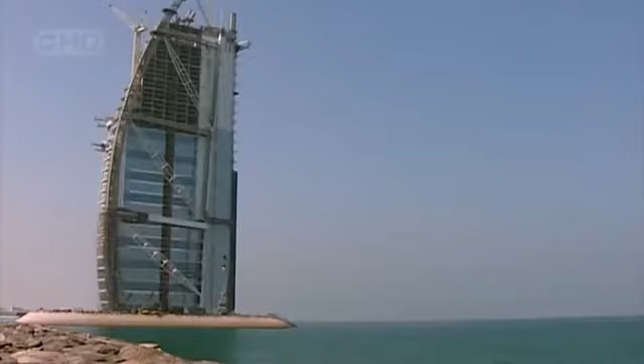Standing proud off the coast of Dubai is one of the most incredible buildings on the planet. At 321 meters, it soars higher than the Eiffel Tower. It's the tallest hotel on Earth and possibly the most luxurious, a structure designed to amaze. Its name means the Arabian Tower. This is the Burj Al Arab. But creating this 21st century icon will be an epic struggle that pushes everyone involved to the limit.

In November 1994, construction begins on what is planned as the world's tallest and most luxurious hotel. The pressure is on from day one. With the eyes of the world watching, no one on the project will want to disappoint this particular client.

Sheikh Mohammed bin Rashid Al Maktoum, Dubai's crown prince, is the visionary behind this amazing building. The project is his response to the economic time bomb his country confronts. As his close advisor, Sultan bin Sulayem knows all too well: he knew that we don't have oil, he knows that oil is going to end someday. And they have two choices: either go and do something about it and find other alternative ways to sustain the life for the people of Dubai, or sit waiting for help.

Only 50 years ago, Dubai was a dusty backwater, home to pearl divers, coastal traders and Bedouin. Then, in the 1960s, prospectors discover oil. The sudden injection of millions of petrodollars transforms the sheikhdom. But geologists predict the oil boom will be over by 2016. The good life could end just as quickly as it began, when the wells run dry.

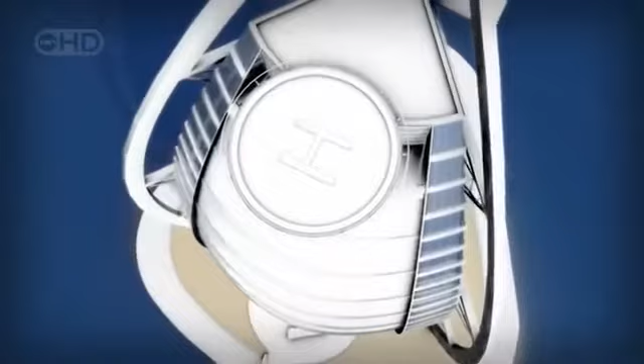Facing future economic meltdown, Sheikh Mohammed makes a crucial decision. He will turn his country into one of the world's most exclusive holiday destinations, a playground for the rich on the Arabian Gulf Coast. The Sheikh needs a luxurious centerpiece to launch his country into high-end tourism. He stakes what some speculate is over $1 billion on the tallest, most lavish hotel in the world, with a unique 7-star reputation, the Burj Al Arab.

I think it was very important to put Dubai on the map of the world. There's no hotel like this hotel. It takes guts, and Sheikh Mohammed has a lot of guts.

The Sheikh's courage is clear from his choice of architects, a radical young team from Britain, brave enough to take up the challenge, but very short on experience. They are led by Chief Architect Tom Wright. We had an average age of 32, not a grey hair between us, and none of us had gone over about 15 stories. I was quite staggered by the scale and the immensity of the project.

Tom Wright and his colleagues have a reputation for innovative engineering, but they're more used to designing schools and offices. But Dubai is a place where connections can make all the difference. Through a contact in the ruler's office, the team gets its break. Sheikh Mohammed agrees to a meeting and is so impressed with their initial concepts, he awards them the contract.

Now Wright must turn his sketches into a design so remarkable, the building becomes a world-renowned landmark. We had many sleepless nights worrying that the building we'd designed wouldn't turn out to be at all iconic. Wright knows he must push his design to the limits.

A building only becomes an icon when its form is simple but unique. We decided that if you could draw a building simply with a few strokes of a pen, and it was instantly recognizable as not only the building, but the place, Dubai in this case, you'd created something that was iconic.

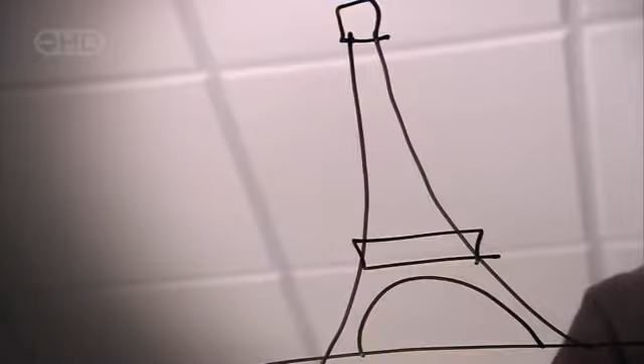So if you consider these buildings in the world, there are probably no more than 10 maximum that have actually achieved this status. Australia, Sydney Opera House. As with all these buildings, it's usually just the first couple of lines that actually make you know exactly where the building is. Paris, and you have to put a flag on the top.

Can Tom Wright and his team compete with the likes of Gustave Eiffel? This is a once-in-a-lifetime challenge.

All the brainstorming pays off when Wright finally has his eureka moment. We were sitting there having a beer, watching the modern sailing yacht come out of the Dubai Offshore Sailing Club. You think of excitement, you think of exhilaration, and we went, hey, this must be the one. The form we came up with is very simple, and within a few lines, I think you can see that it has all the elements of an iconic building. It's simple and instantly recognizable.

The concept immediately catches the Sheikh's imagination. A sail billowing in the wind has deep meaning for the people of Dubai with their seafaring heritage. To complete the nautical image, Wright wants the structure to rise out of the water like a massive yacht. But this will require an island as a base, and there are none.

Wright's undeterred. He proposes they build an island specifically for the hotel, a first for Dubai. Constructing the hotel out at sea will significantly add to the risk and cost.

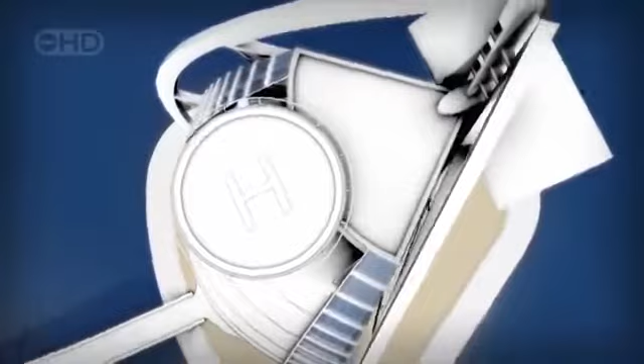Sheikh Mohammed is prepared to take the risk. The hotel will be built 280 meters off the coast. No one has ever built a skyscraper this high on an artificial island. This 321-meter structure, weighing 250,000 tons, will need to stand firm against earthquakes and Gulf storms. Wright has won the first of many battles. The Burj will rise out of the sea. But time and again, his refusal to compromise will force his colleagues to push the boundaries of engineering to the limit.

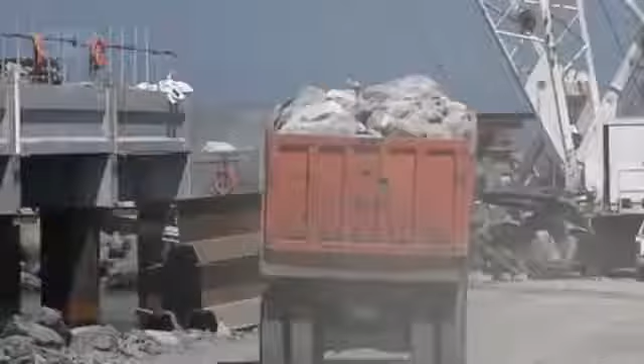By early 1995, the construction team is hard at work on Phase 1, building a low-lying island. But the inexperienced architects are about to get a taste of Dubai's extreme weather.

April the 27th, a powerful storm known as a shamal sweeps across the Gulf, hitting the coast with a vengeance. A set of construction barges lie in its path, each laden with 10,000 tons of rock. The architects have planned for all weather conditions, but the storm's intensity still shocks Simon Crisp. We had 3 or 4 metre waves bashing onto the beach. To see the waves coming in like this was really quite a wake-up call for us.

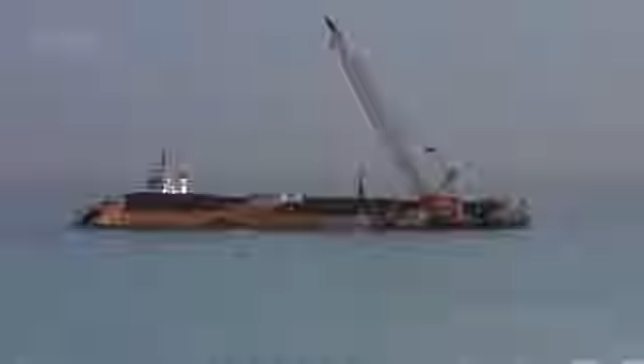One huge barge breaks loose and slams into the mainland. The team realizes the damage this kind of storm could inflict on their island hotel. We had a really graphic example of how powerful the Arabian Gulf can be when it's angry. The architect's decision to expose their structure to these forces could have serious consequences. The engineers will have to struggle to produce a low-lying island capable of resisting nature's fury.

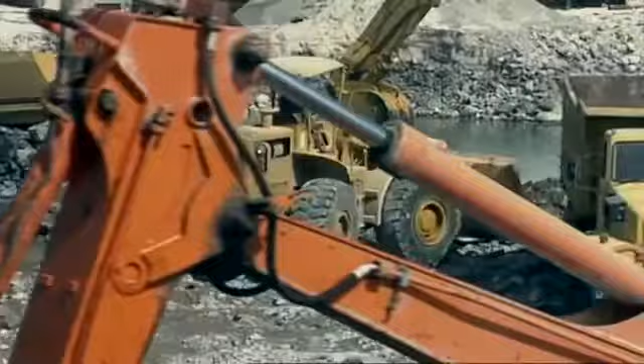The man-made island for the world's tallest hotel has hit a critical stage just 5 months into the build. Dubai's Sheikh Mohammed is depending on this project, the Burj Al Arab, to convert his country from oil producer to top-class tourist destination. But a debate rages over the island's height. Architect Tom Wright wants to make it low to give the impression of a sail rising out of the water.

We argued a lot about the height of the island. From a design point of view, I wanted people to be close to the sea. From the start, he's gone head-to-head with engineer Mike McNicholas, who's responsible for the island's safety. So I wanted the island as low as you possibly could, you know, skimming the sea. I'm coming from the other end, needed to make sure we were protecting the island.

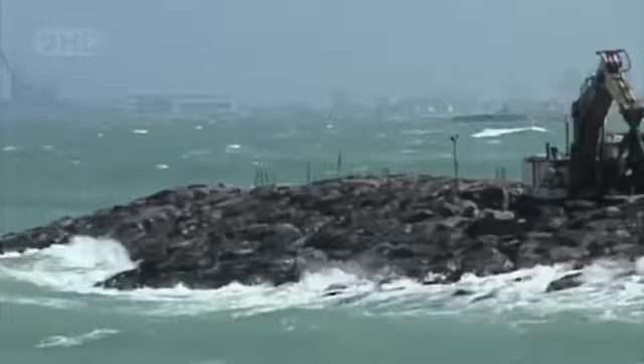McNicholas's worst fear is that waves breaking over the island could damage the hotel or even drag guests into the sea. Initially, the engineers planned to build the island using rocks. They are available locally and the technology is proven. But Wright rejects this. A rock island would have to be far too large to repel the sea safely.

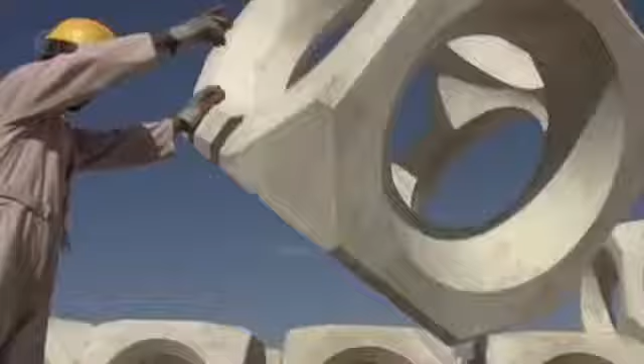To keep the island low, McNicholas experiments with pioneering concrete blocks designed to reduce the impact of waves. But no one in the Gulf has ever used these blocks before. I had to insist with the team that we carried out tank testing. It was the only way we were going to be sure that the island would be safe.

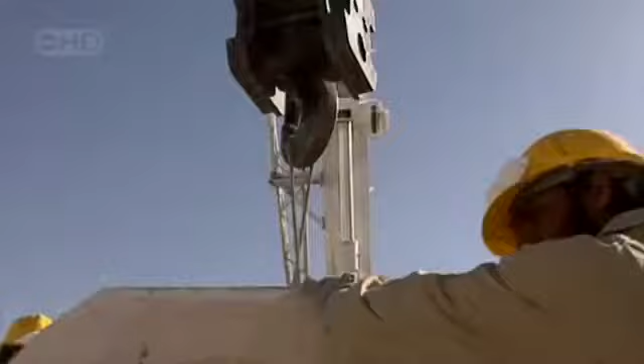These tests replicate the power of the tallest waves that can occur once in 100 years and send them crashing into a series of differently configured models. 3 weeks of testing prove the hollow blocks will work.

The construction team builds the island with steep rock slopes, then covers them in concrete armor to absorb the force of the waves. These ingenious blocks work like a sponge. As the wave hits, the water passes inside the space and turns around on itself. The force is largely dissipated. With the engineers' help, architect Tom Wright has won his battle for a secure island that rises only 7.5 meters above the waves.

Now the team begins the second stage of construction.

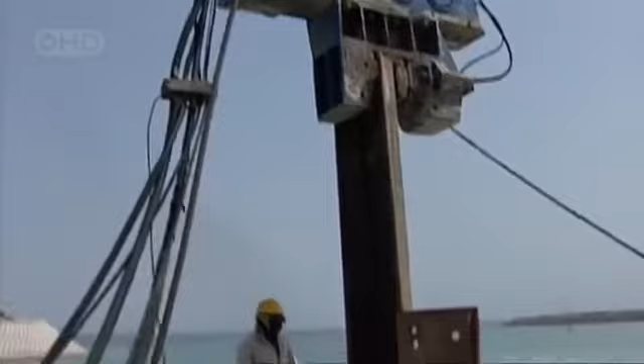In the center of the island, construction workers drive huge lengths of steel 20 meters into the ground. This creates a triangular steel wall known as a cofferdam, which will become the outside of the hotel basement once they excavate the sand from inside.

But removing the sand could be dangerous. That was a real challenge for us. It's sleepless days and nights, seven days a week, figuring out how we were going to stop the seawater coming into the structure, and how we were going to stop the seawater coming around our structure from beneath and flooding it.

The weight of the sea is a huge force on its bed. This pressure forces water through the sand and threatens to flood the artificial island from beneath.

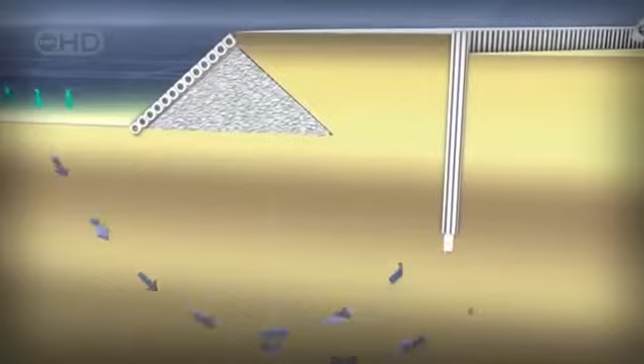To keep the sea out, McNicholas injects liquid cement into the sand to seal off his steel wall from below. But as the sand is removed to form the basement, there's less and less weight to hold back the force of the sea. The cement seal is going to be tested to the limit. In the worst case, the pressure caused by that water movement could have blown the whole bottom of the excavation like a champagne cork.

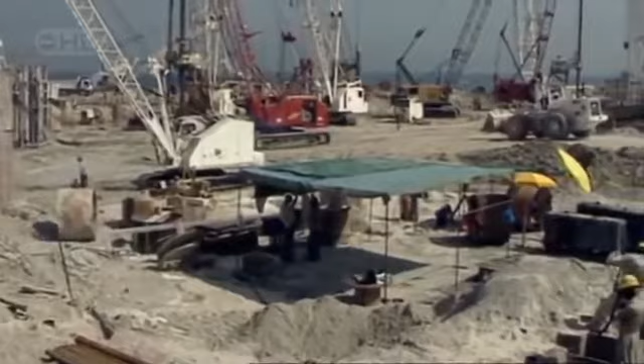If McNicholas's calculations are wrong, the excavation could be swamped, killing hundreds of workers. But he stands by his design. With the cement seal in place, the excavators begin to remove the sand.

As the man responsible, he's not going to let the workers face the risk alone. I felt I had to be one of the first guys down at the bottom of the excavation, looking up 10 meters above myself, thinking, each side of this cofferdam is 7,500 tons of sea pressure pushing in.

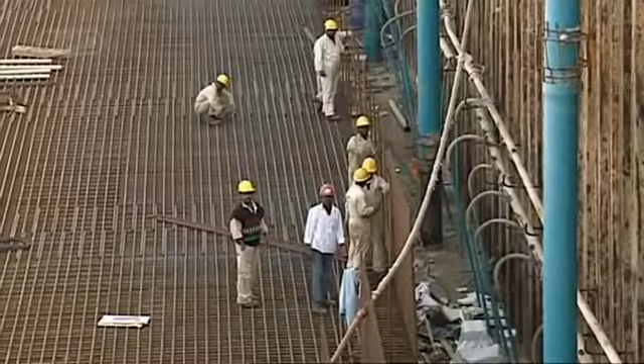When put to the test, both wall and seal hold firm. One of the probably proudest moments of my career was being stood on that excavation and looking around and seeing the steel wall there surrounding me and thinking, we are holding back the sea. My design worked.

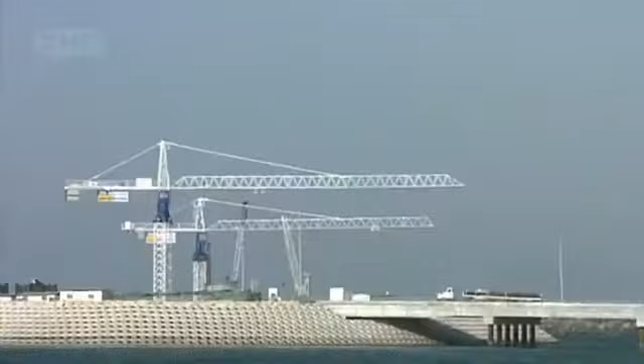November 1995. The artificial island for the tallest all-suite hotel in the world is now complete. The construction team starts phase 3 of this one-off project, the foundations. The support needed for any skyscraper is vast.

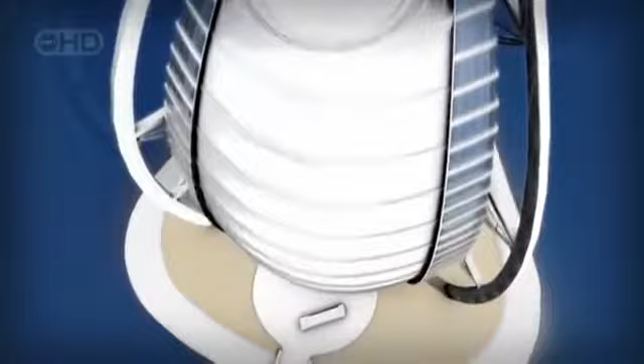But the location of the Burj Al Arab presents an added challenge. It had never been done before to build something like this on reclaimed land. We're talking about a 300-metre high tower on a man-made island in 6 metres of the Arabian Gulf.

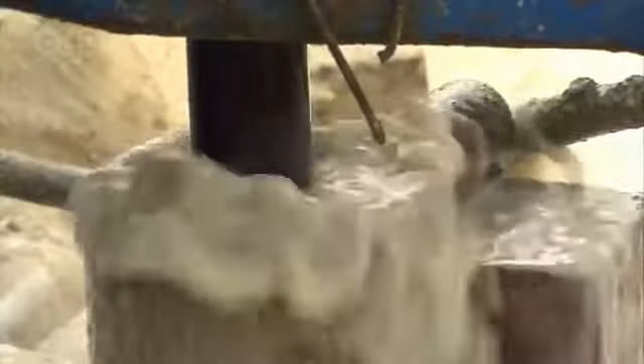The problems multiply when the results of earlier core tests reveal bad news. The team searching for bedrock drilled deep into the seabed, but even a full 180 meters down, there was no solid rock. This will make their job tougher, but the architects remain defiant.

The average person would think we're crazy to build something like this on sand, let alone out in the water. How will this 300-meter structure stand firm against earthquakes and winds of close to 150 kilometers an hour when its foundations depend on nothing more substantial than sand?

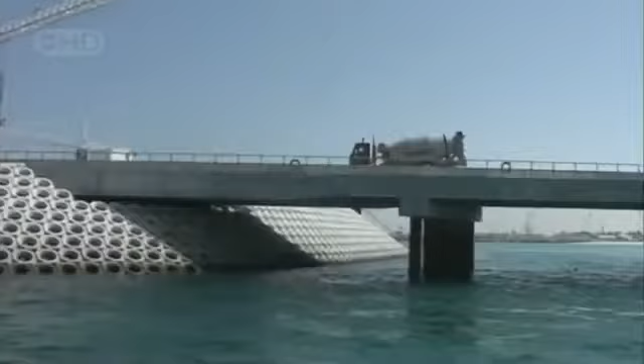On an artificial island 280 meters off the coast of Dubai, construction workers are preparing the ground for the tallest hotel in the world, the Burj Al Arab. But there's no bedrock beneath the site to support the foundations for a skyscraper.

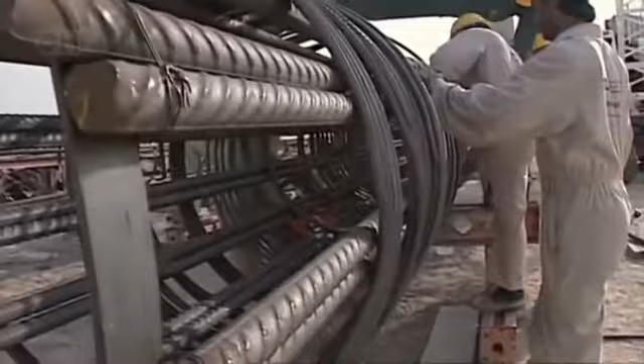The architects have a plan. They want to support the Burj using steel-reinforced concrete foundation piles drilled deep into the sand. So what's to stop the whole structure from just sinking? They are relying on an effect known as skin friction, the resistance that stops two rough surfaces slipping past each other.

Skin friction is all about the contact between the sand and the surface of the pile, and the longer the pile, the further in the ground it is, the greater that effect. I'm going to demonstrate it now by whacking it in. You'll see it starts to move quite quickly with the first few impacts. Now it's starting to stiffen up a bit, even though I'm not hitting it any harder or softer, and the skin effect is starting to really kick in here.

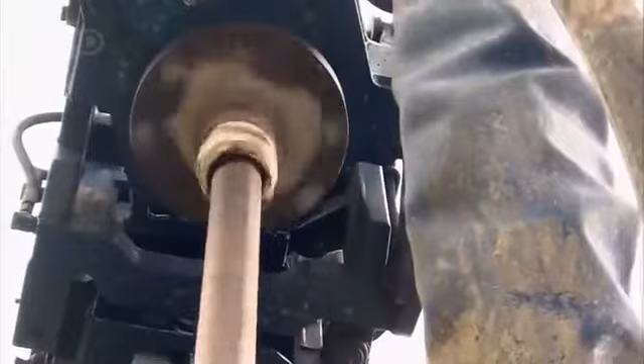Once the friction between the post and the sand around it equals the load of the hammer, the post comes to a halt. The scheme will only anchor the Burj if the sand is compacted enough to create resistance around the building's piles.

The drillers pack sand samples into sealed containers and send them off to be analyzed. If the results show the sand is too loose, then support on the piles anchoring the building could suddenly fail.

The geography of Dubai gives everyone reason for concern. It lies within range of a major fault line, so this soaring megastructure could be vulnerable to earthquakes.

In June 1964, a 7.5 magnitude earthquake hits Niigata in northern Japan. Because the area is built on sandy silt, the tremors flip over entire apartment buildings. This isn't normal earthquake collapse, it's a devastating phenomenon known as liquefaction. As grains of loose sand shake, they fill up any air pockets and compact, taking up less space. The ground stops behaving like solid earth and acts like a liquid. On shifting sand, any building could simply topple.

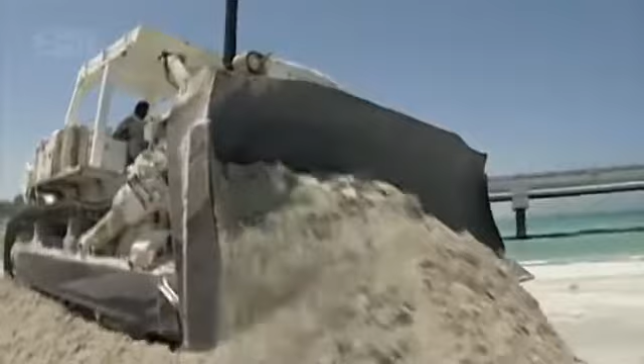When the results of the drilling tests return, it's good news. Deep beneath the site, they find compacted and calcified sand. Liquefaction is not a threat.

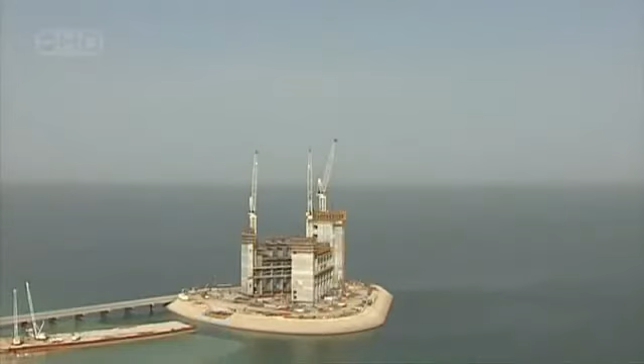One by one, the engineers are solving the challenges thrown up by this extraordinary structure. But in 1996, they brace themselves for a new set of obstacles as Phase 4, the construction of the hotel itself, begins.

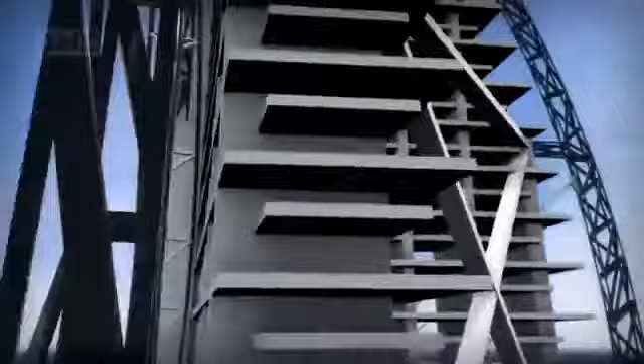This building had to stand up to the worst that the Gulf could throw at it. The hotel itself has slender concrete walls, not capable of withstanding the elements alone. To hold them firm against high winds and earthquakes, the architect devises a visually stunning solution: a gigantic steel structure outside the main building, known as an exoskeleton. A series of vast diagonal trusses tie two huge steel bows to the concrete core at the back of the building.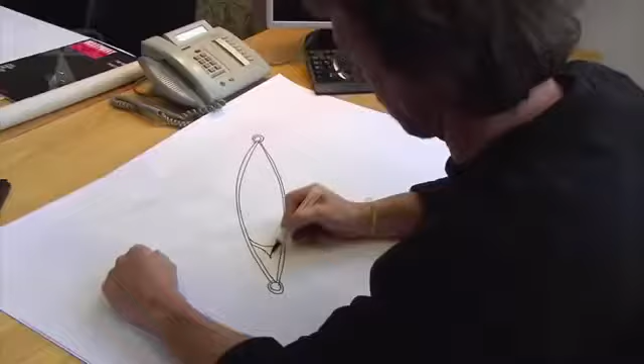Wright's design will make the building unique. But his giant diagonal trusses will make life hell for Anthony McCarter, the engineer who has to make them work. Those trusses gave me 4 months of heartache, sleepless nights, worries, anxiety. They must be incredibly strong to tie the exoskeleton together, but aesthetics are just as vital. It was critical that these diagonals were very, very elegant and also very beautiful as they're so visible.

This building has to wow the world and make Dubai a must-stop destination. Wright's not about to compromise. I used to go to Tom with option after option. I remember one particular occasion where I had 7 options and he went, no, no, no, no good, no good, no good.

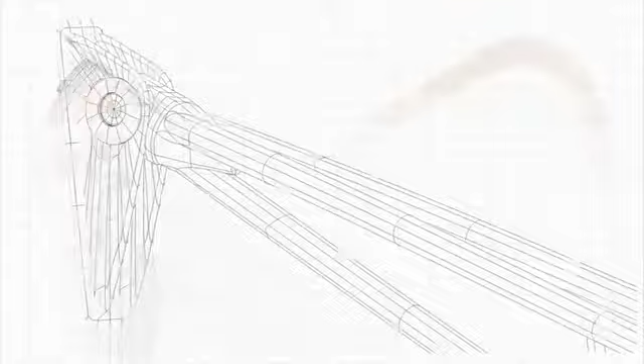Eventually, McCarter finds a form that works structurally and is graceful enough to fit Wright's vision. But this in turn causes nightmares for Malcolm Murphy, the chief contractor. It's okay for the architect to draw pretty pictures, but we have to build it.

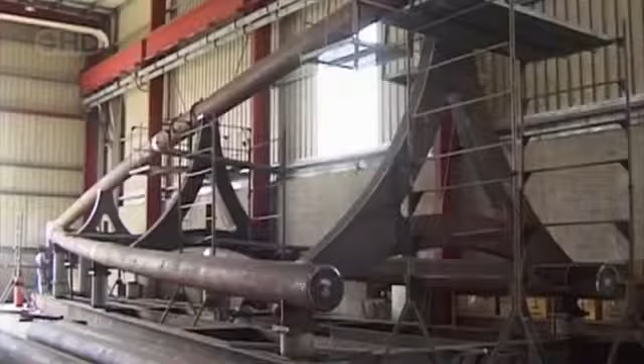He finds a factory just 15 kilometers from the construction site capable of welding the huge diagonals. Each one is longer than the Airbus A380 Super Jumbo and heavier than 20 double-decker buses. Welding these complex forms in the factory is the easy part. Transporting them to the site is not. With each truss weighing in at 165 tons and reaching a staggering 85 meters in length, it's no easy task.

And the challenge is to do that. It's just unbelievable. No one has ever transported anything this size before in Dubai. But Murphy's not going to be beaten. He brings in one of the world's largest heavy lift transporters, a beast with a total of 80 wheels. It makes the slow journey to the construction site at an average speed of around 6 kilometers an hour. Police must close roads and remove traffic lights to allow this convoy through.

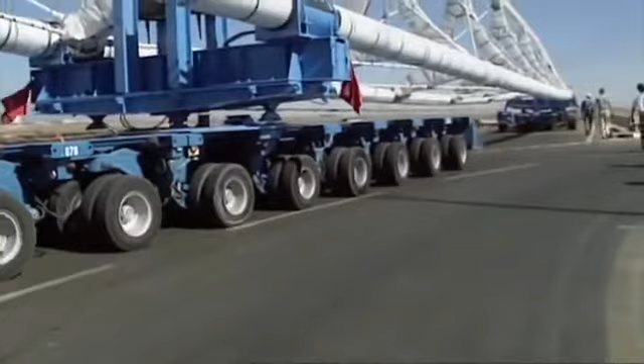When they finally reach the site, the contractors face their next hurdle. These 165-ton beasts have to be lifted into position. The architect refuses point blank to position these things in 3 pieces, which we wanted to do originally. And he said, no, aesthetics, I'll not allow you to weld up there. He has to find a way to lift the trusses in a single piece to a height of almost 200 meters, twice the height of the Statue of Liberty.

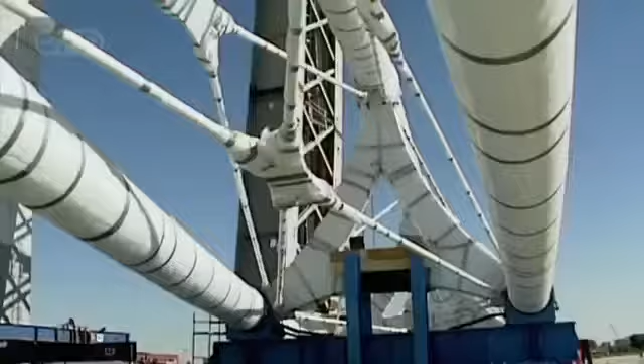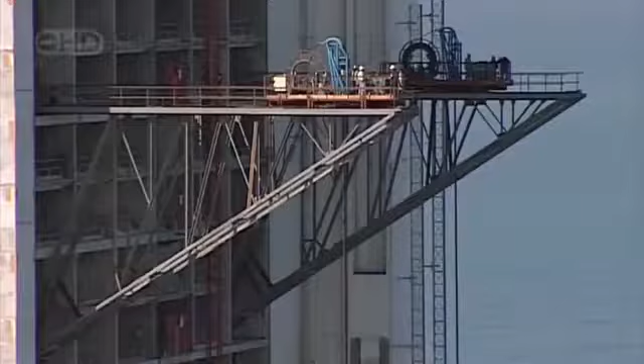We had to go away and think of an idea how to actually lift these monsters up. We had 3 big monster cranes in there, and even they weren't big enough to lift the diagonal trusses. Murphy must look further afield for a solution and brings in specialist lifting gear from Singapore. His team sets up winches, like those used on offshore drilling rigs, high on cantilever frames 15 meters from the building. Cables with a breaking strength of 225 tons are attached to the end of the truss.

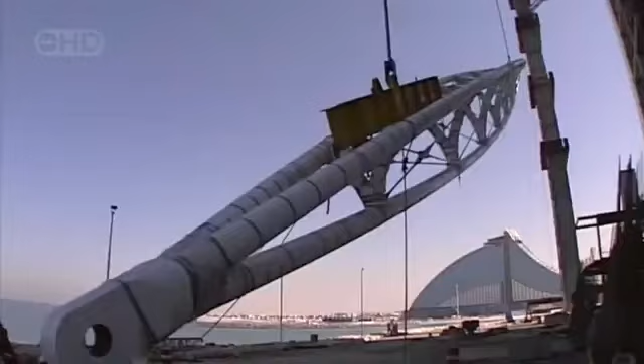I can assure you we were very, very nervous that morning when we lifted the first one. 30 or 40 guys had sleepless nights that week, getting ready for that first lift. The 2 massive winches take up the strain and then painstakingly raise the diagonal truss little by little up the side of the building. It's all going to plan. Murphy and his team have solved the lifting dilemma.

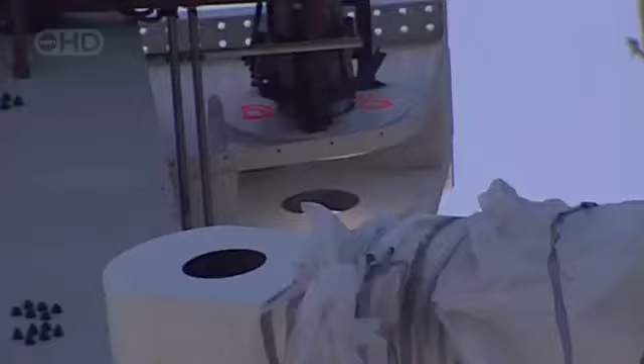But these trusses have a sting in the tail. They need to fit into place with pinpoint accuracy. But Dubai's climate means temperatures can vary by as much as 14 degrees in a single day, and this will make the trusses expand and contract dramatically. The problem's known as thermal expansion.

The steelman's nightmare in the desert, working at 50 degrees Celsius. Steel expands in the heat and contracts when cold. Okay, chaps, light up.

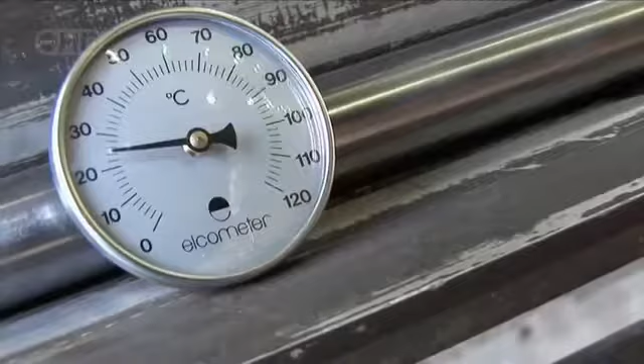We're actually going to heat the steel up now, which is going to give you an idea of what temperatures we're working in the desert. Heat makes the steel molecules move faster and further, and this 15-meter tube actually grows in length. The difference is visible. What did I tell you? Steel does expand with the heat.

The diagonal trusses on the Burj Al Arab could expand and contract by a full 5 centimeters over a 24-hour period. They will never fit their precise point in the framework without an ingenious solution.

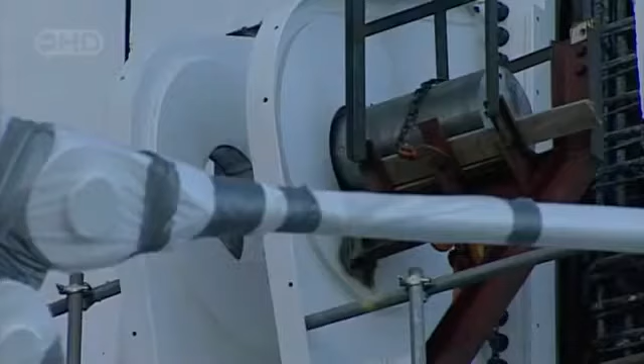The engineers thought about it, the structural fabricators, the steel fabricators, the architects, everybody thought about it, and it was actually one of the architects who came up with this great solution.

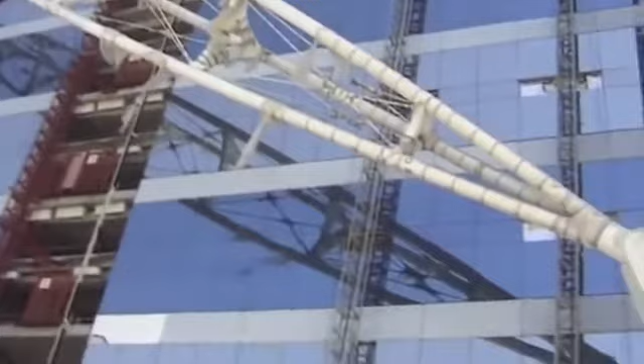On the frame of the structure, the fixing bracket contains a vast washer with its hole offset from the center. This swivels until it lines up with the hole in the diagonal truss. Then, the cast steel pin, about 30 centimeters in diameter, is inserted through both holes, locking them together. This clever device buys the team the crucial 5 centimeters of play they require for the installation, and the truss is now fixed securely in place.

When we got that pin in, we had those champagne corks flying. It was just unbelievable. But there's precious little time for celebration.

The first VIP guests will arrive before the millennium. This leaves the team less than 36 months to complete the entire project. Sheikh Mohammed's vision for the Burj Al Arab meant that it was needed yesterday.

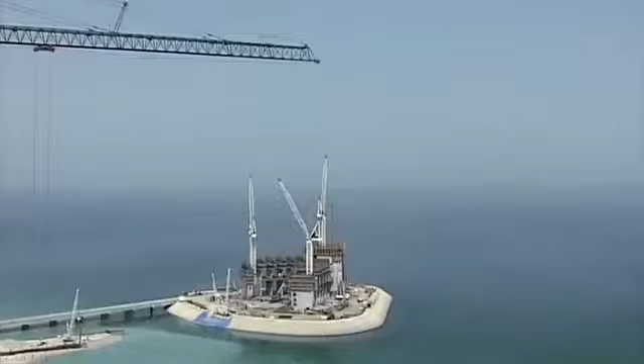January 1997. A colossus is emerging out of the Arabian Gulf. The Burj Al Arab is to be the tallest hotel in the world, the last word in luxury and a proud symbol for Dubai.

Architect Tom Wright wants the building to be beautiful. The steel sections of the exoskeleton that will support it must be as minimal as possible.

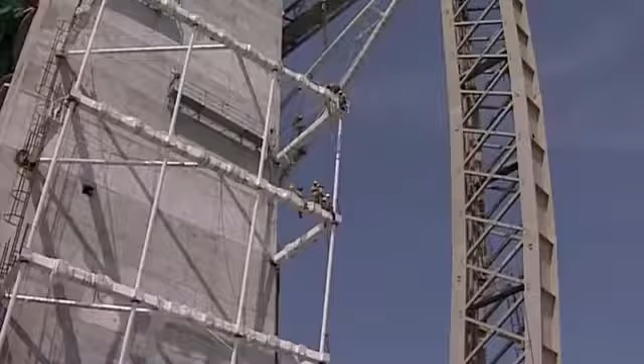The view from these $2,000 a night suites will have to live up to the price tag. When you're in the suite, looking through the windows, they are right in front of you, so they have to be exceptionally well detailed and well put together.

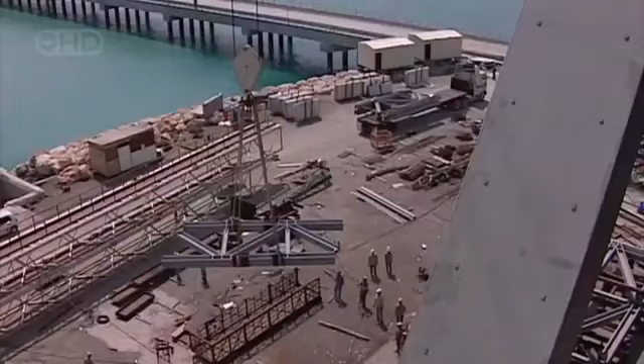But this creates a dilemma. If Wright makes the exoskeleton too light, the wind's force at 300 meters above the Gulf could shake the building apart. Too bulky, and the elegant form of his yacht-shaped structure is ruined. Once again, Wright and the engineers, who must make his hotel safe, are on a collision course.

When you're designing a building that is taller than the Eiffel Tower, and you've never done one before, you want to make sure that you've got it right. This structure is so unusual.

For the first time in Dubai's history, engineers decide to do tests in a wind tunnel. Wind engineer Volker Butgereit knows the Burj Al Arab is one of a kind.

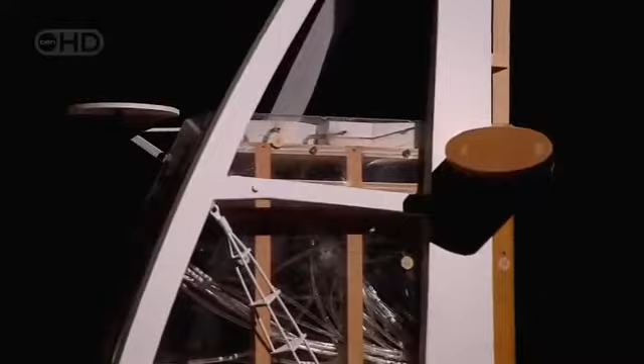Before this building came along, most of the buildings in the Gulf were fairly orthodox shape. They were square, they were rectangular, they were nowhere near this scale. So doing a wind tunnel test for a building in those days in the Gulf was almost outrageous.

But for this extraordinary structure, it's essential. The wind tunnel simulates the wind effects of the Gulf around this 1 to 50 scale model.

This building has seen some pretty severe loads, almost twice what it would see in London. We measured suctions which were the order of the weight of a car hanging off, trying to suck the panel off the building. So that's quite something.

The wind tunnel throws up results that could threaten the entire exoskeleton. When we first saw the design, there was immediate concern about vibration due to something called vortex shedding.

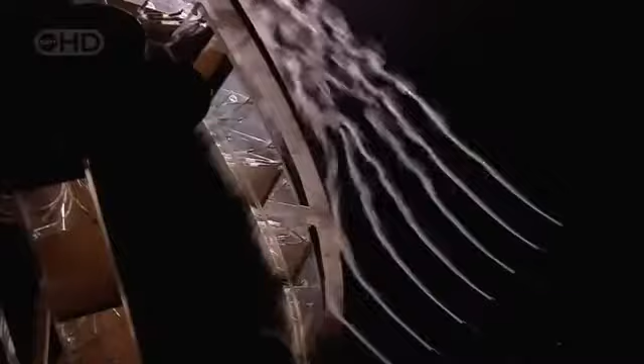Vortex shedding is an engineer's nightmare. Certain wind conditions blowing over sharp edges on the steel structure can create miniature tornadoes. These set up dangerous vibrations that can shake a building to destruction.

Which is exactly what happened to these massive cooling towers in Ferrybridge, Northern England, in 1965. The engineers must find a way to protect the Burj Al Arab.

The simplest solution is to change the aerodynamic shape, but that upsets the architect. The architectural idea of the exoskeleton structure is, when you look at it, the very essence of the building. If you take it off, it's just another building. If you put the exoskeleton structure on, you have an icon. So the engineers need to think again.

This is classic vortex shedding. We realized we had to come up with something clever that was not visible, but somehow reduced the motion.

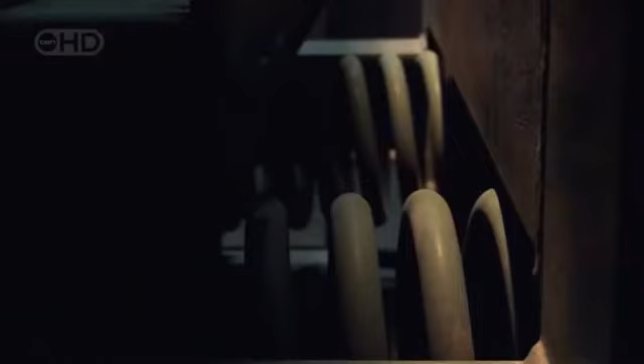They turn to an ingenious hanging weight called a tuned mass damper. These are installed at vulnerable points in the exoskeleton. When the wind blows and vortex shedding starts to create dangerous vibrations, the 5-ton weight will swing instead of the structure, damping down the vibrations to well within safety limits.

11 of these systems are fitted from the top of the 60-meter mast all the way down through each of the steel bow structures. These dampers safely cancel out the threat.

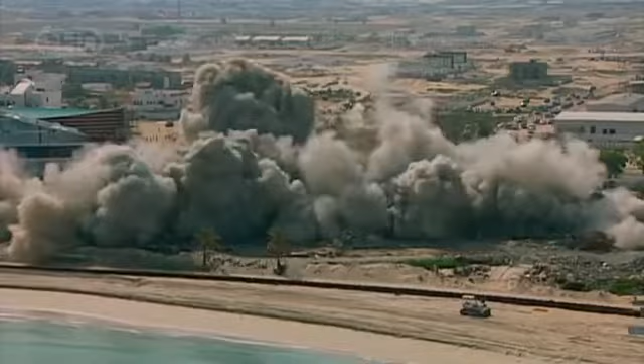June 1997. Dubai is reinventing itself as the luxury tourist destination. This old hotel bites the dust as the Burj Al Arab, the symbol of the new Dubai, approaches its final form. Just 30 months before the deadline, the crew begins constructing the toughest engineering challenge.

Sheikh Mohammed wants the building to amaze, so the design calls for a restaurant that looks as if it's suspended in the sky. I like the idea of the visitor sitting out in space, looking across the view towards the Arabian Gulf and Dubai, almost floating up in the clouds. The whole idea of hanging out over space would give you a dining experience pretty unparalleled.

The Al Muntaha, or Ultimate Sky View Restaurant, will soar 200 meters above the sea and project nearly 27 meters out on both sides from the building's narrow central core. Once again, Wright's throwing down a gauntlet to structural engineer Anthony McCarter. Can he secure this eccentric wing-like structure with no visible means of support?

When Tom first showed it to me, I must admit I thought he was crazy. This room is actually the size of most buildings, and Tom decided he wanted to take it and stick it outside of the centre of gravity of the supporting structure. So there it was, dangling in the breeze with only the structural engineer to hold it up. And if the engineers get the calculations wrong, the whole thing could tumble 200 meters to Earth.

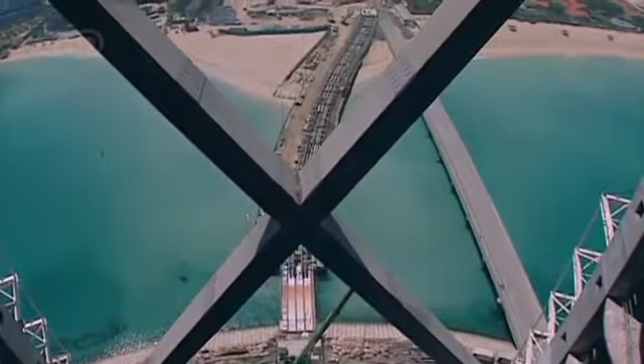McCarter finds a solution to the pull of gravity that pushes conventional engineering to new heights. In the concrete core at the back of the building, he casts a series of steel brackets known as embedments. 10 enormous steel girders radiate off them, up to 1.6 meters high.

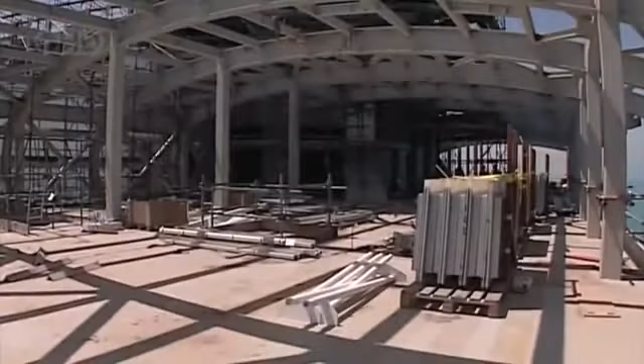These beams form the base of the rigid steel floor. The wing-like exterior can be attached to it, and then the entire restaurant is enclosed in aluminium and glass. This gravity-defying structure will survive winds of close to 160 kilometers an hour. It's an engineering triumph.

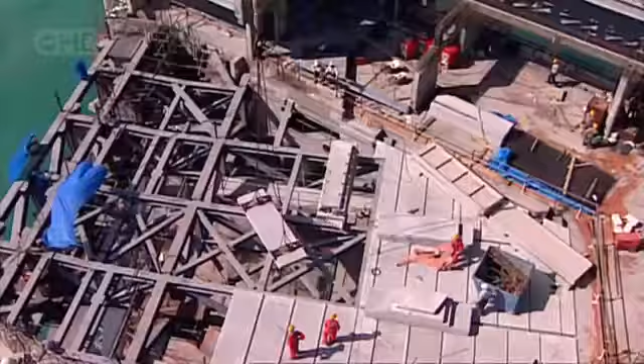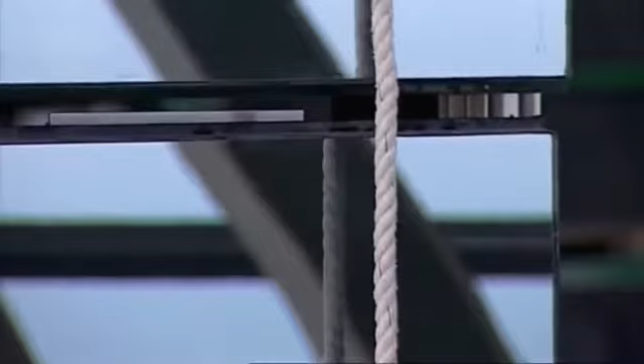The Burj Al Arab is due to open in time to celebrate the millennium, just 2 years away. The world's media are watching to see if the hotel will be the masterpiece the Sheikh promises, and if the team can complete it on schedule.

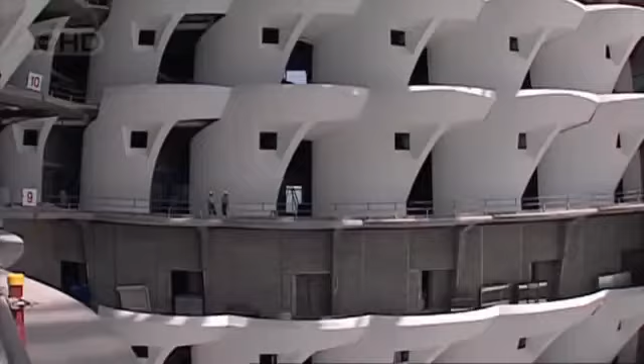The only way to deliver on time is to start the interior decoration long before the exterior is finished. In a temperate climate, this wouldn't be an issue, but humidity in Dubai reaches 100%, and temperatures can soar to a scorching 49 degrees. These conditions simply won't allow the team to fit delicate finishes like gold leaf, silk and carved wood.

If we'd started to put materials that were susceptible to moisture at that time, they would have just fallen apart. To make the deadline, the contractors need to air condition this giant building site and bring the temperature down dramatically.

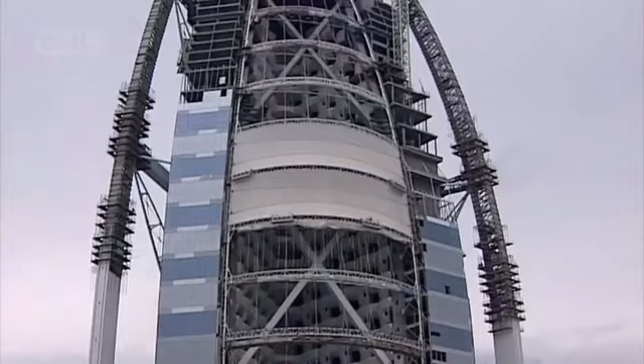The first step is to enclose the building by installing the final wall, Wright's iconic white sail. But it's going to be tough. When we first proposed the idea of the fabric sail wall, there was a lot of scepticism. People thought that it couldn't be done.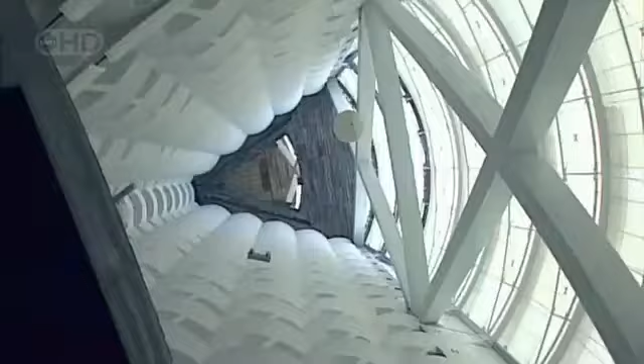They stretch woven glass fibre sections between huge horizontal beams. The surface is pre-coated with Teflon to resist dirt and sand. The result notches up another first for the Burj, the largest fabric wall anywhere in the world. The reflective properties of the white sail will help keep the temperature down.

But the contractors still need to find a way for trucks to enter the building without allowing in the desert heat. The solution is to install a huge airlock. Trucks drive in, the vehicle pauses as the doors close behind it. A second set of doors then open, and the vehicle moves out of the building.

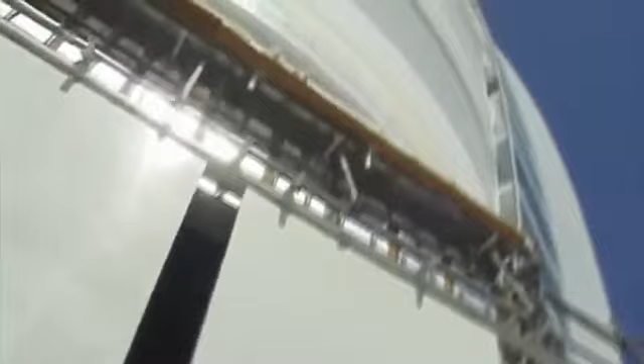The airlock and the sail wall now seal off the building. But cooling a space this large during construction could create a major setback. This unique structure now boasts the world's largest atrium, soaring to an amazing 180 meters.

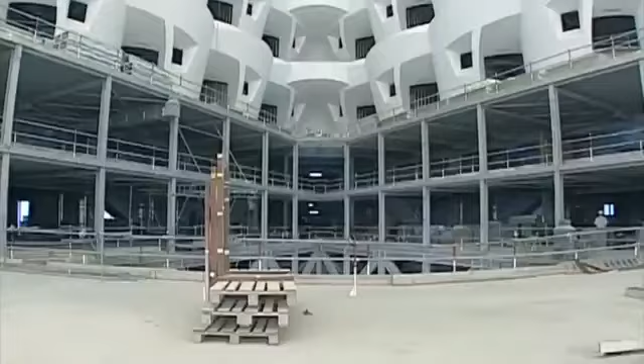All this warm air can hold far more water vapor than cold air. If they cool this hot, humid environment too quickly, they will create uncontrollable condensation. We could have had a rain cloud form at the top of the atrium and create massive damage to the interior design. The only way to avoid rain clouds will cost valuable time.

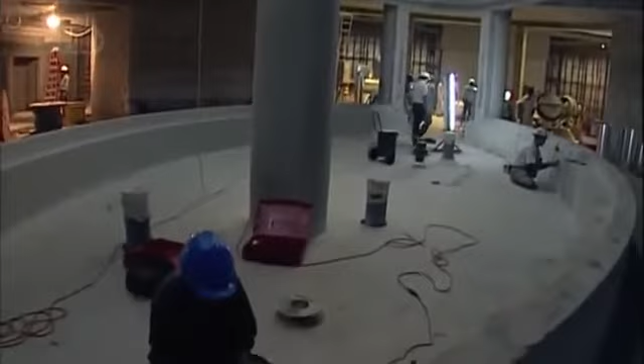The contractors switch on the giant cooling system and bring the interior temperature down steadily by less than 1 degree a day. Given the schedule, it's painfully slow. We started to cool the building down in June 1998. By December '98, it was pretty well down to temperature.

At last, the interior decoration can begin. But the hunt for a designer who can create interiors worthy of a sheikh causes further delays.

Khuan Chew, who's already worked for the Sultan of Brunei, knows exactly what it takes to satisfy royalty. It's great news when she agrees to take on the most luxurious hotel on the planet, with its daunting 202 palatial suites and the 180-meter atrium. But she has just 24 months from design to completion to be ready for the guests booked in for the millennium.

I had a very, very tight program. So what we did was that the entire office, all 50 designers, just dropped everything else. Solidly, we just worked on the Burj Al Arab.

She not only faces a frantic schedule, Sheikh Mohammed is expecting her to amaze the world. The brief basically asked us to design something that's never been ever designed before, and that will never be designed ever again.

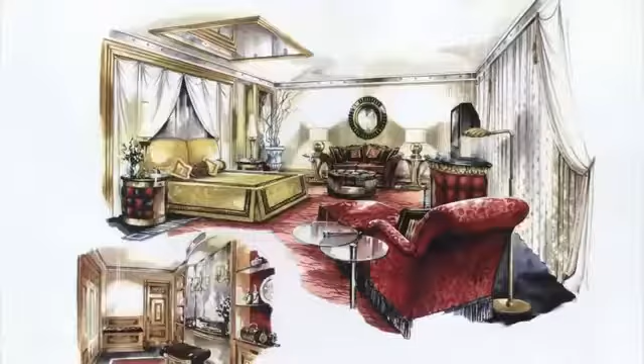Khuan Chew and her team pull out all the stops and begin to produce interiors they hope will match the Sheikh's ambition. But as they struggle to meet the deadline, another more severe problem comes up. The Sheikh wants to offer guests every conceivable electronic gadget in their suite. This new requirement could have dangerous consequences.

A new member of the team is suddenly in the hot seat. Electrical engineer Rob Roos faces the biggest challenge of his career. There was a total redesign, a total change in the interior design, and that imposed overnight almost a 50% increase in the electrical load of the building.

The Sheikh's new plans mean each suite requires an enormous 14 kilowatts. That's 8 times the load of a normal European house for every suite. With 202 suites, that's roughly enough electricity for a town of over 6,000 people.

The hotel will have electric curtains throughout, 52,000 lights, most of them on dimmers, and over 5,000 kilometers of electric cable.

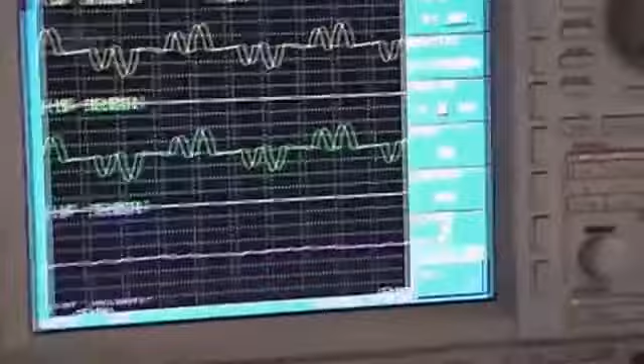All these electronics can scramble the waveform of the electric current and create a problem known as harmonic distortion. This can melt the sheathing around live cables and cause a raging fire.

That was a situation which was just totally unacceptable. We had to deal with that.

The people of Las Vegas know just how lethal a hotel fire can be. November 1980, in the city's MGM Grand Hotel, a pair of electrical wires short-circuit. This causes a blaze that wreaks destruction. 85 people perish in this real-life towering inferno, and over 700 are injured. It's one of the worst hotel fires in history, all caused by a simple electrical fault.

Roos needs a solution to the fire risk, and fast. Obviously, the hotel was under construction. There were some fairly heavy deadlines to try and get the hotel finished and opened, and this was a major change.

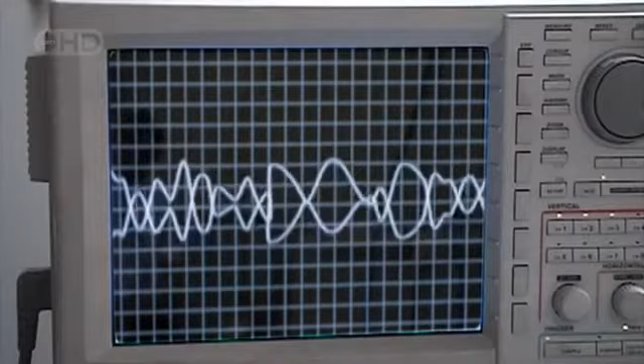His response takes electrical engineering to a new level. He devises a harmonic filter system. First, it detects the electronic distortion, then it sends a current that's the mirror image to cancel it. It's called antiphase and works like noise-cancelling headphones. He installs his filters on key floors, and at the point the electricity enters the building.

No one has ever attempted a system on this scale before. This was the largest active filter installation of its kind in a building like this anywhere in the world. A world-class solution for a world-class megastructure.

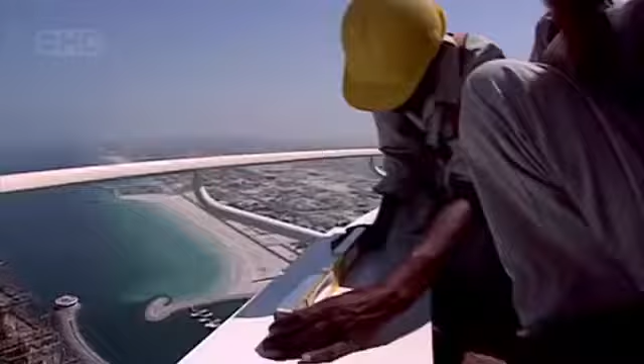The team constructing the Burj Al Arab can claim a string of groundbreaking achievements. They build the first artificial island off the coast of Dubai, construct the tallest atrium in the world, enclosed by the largest fabric wall ever built. And with the mast finally in place, this structure, for now at least, is taller than any other hotel on the planet.

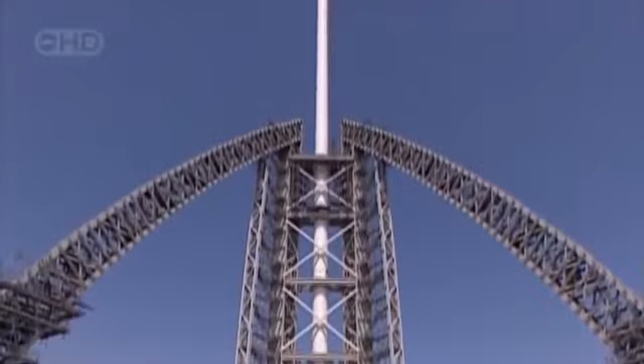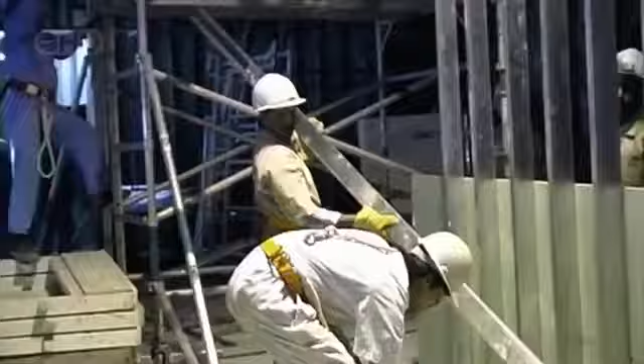Now, 5 years into the project, the team reaches an important milestone. The iconic exterior is almost complete, but the interior decoration of the world's most luxurious hotel is seriously behind schedule. This stage has always been a race against time. Now Sheikh Mohammed is about to send the design team into a tailspin.

Dubai, April 1999. The world's tallest and most opulent hotel is approaching completion. Everyone is rushing to finish the hotel, ready for the millennium deadline. Interior designer Khuan Chew is still operating in overdrive. Christmas was cancelled, Easter was cancelled, bank holidays were cancelled. We basically made 50, 60-hour weeks.

Her brief from the Sheikh is to shock, to innovate, to amaze the guests with a modern Arab palace. And she delivers in spades with over 24,000 square meters of marble from Italy and Brazil, the equivalent of nearly 3 soccer pitches. Over 8,000 square meters of 22-carat gold leaf give the desired impression of luxury. And she completes the appearance of total indulgence with crystal chandeliers, woven silver and velvet.

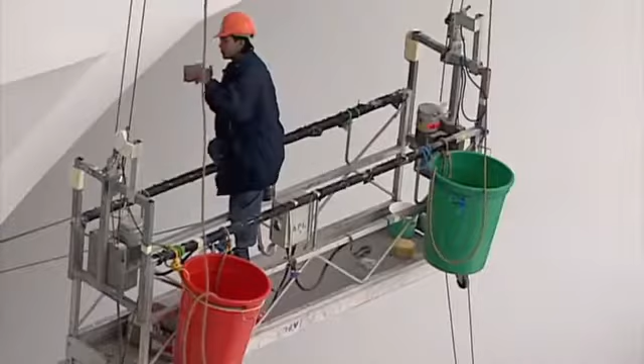But for the world's largest atrium, Khuan Chew makes a radical decision. She goes minimalist. She lets the complex architecture speak for itself by painting it all white. The interior decoration is almost back on schedule.

Then comes the moment of truth. Sheikh Mohammed arrives to examine her work and pass judgment. The man behind the whole project is delighted with the ornate styling of the luxury suites. But that's where the good news ends. I was summoned and said, when are you finishing off this atrium? I said, well, it's nearly done. Unfortunately, the feedback was no.

Where's the color? The Sheikh completely rejects the white styling of the atrium. It's just too plain. Not exciting enough, not bright enough, not colorful enough, not rich enough. Khuan Chew has to completely redesign and decorate the tallest atrium in the world in just 6 months. I was basically living and sleeping in the Burj Al Arab, rushing from area to area.

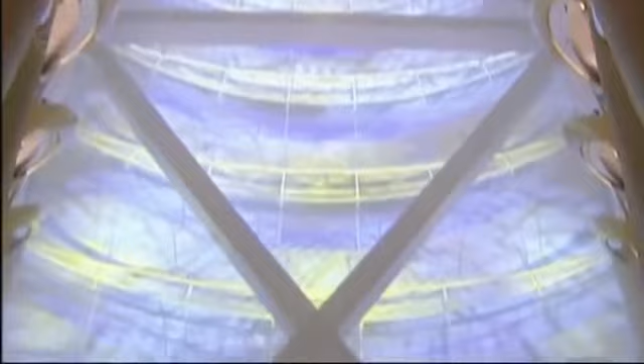This is her last chance to get it right, so she sets out to dazzle. She designs a light show to animate the world's tallest fabric wall. Fountains create aqua gymnastics in the lobby. Vast fish tanks welcome visitors as they ride the escalators. And crucially, she transforms the view up the atrium into a rainbow palette of vibrant colors.

Will it satisfy Sheikh Mohammed? Everyone's on tenterhooks. The adrenaline was pumping, sleepless nights basically before opening. The Sheikh's response is a definitive yes. He's delighted and signs off on the project. Sheikh Mohammed believes it became almost a 6 to 7 star hotel, and the achievement of his dream, the realization of his dream.

The doors open to the first ultra-rich guests in December 1999, a full month before the millennium. And Sheikh Mohammed comes to watch the final sunset of the century from his magnificent new hotel. Architect Tom Wright and the team have fulfilled the brief. Every part of this iconic structure is extraordinary.

In the ground floor restaurant, a team of divers care for 700 exotic fish in this 280 cubic meter tank. The result allows guests to get intimate with sharks while they eat. At the opposite end of the world's tallest hotel, this amazing feat of engineering, the Cantilever restaurant, delivers Tom Wright's vision of dining in the sky. A spectacular combination of fire and water greets you before you even enter the building.